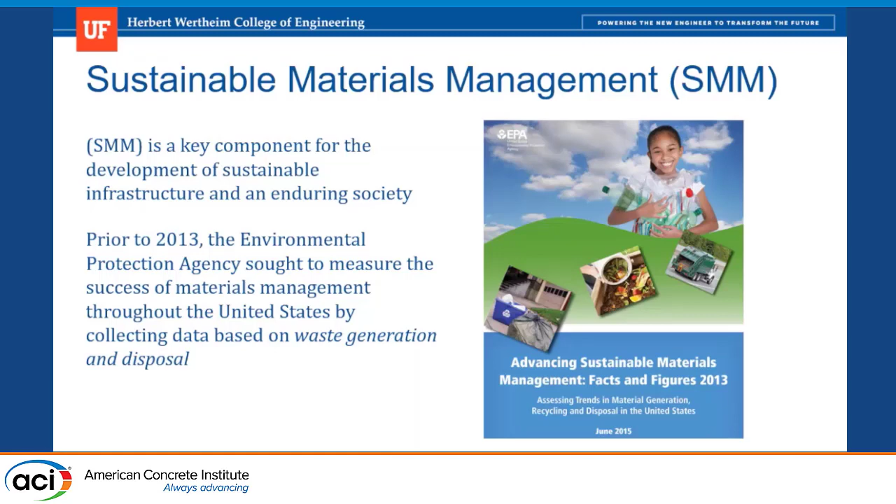This was basically put forward by the EPA about 10 years ago now, where they wanted to see the measurement of success of materials through the US based on waste generation and disposal. So we're talking about waste materials now.

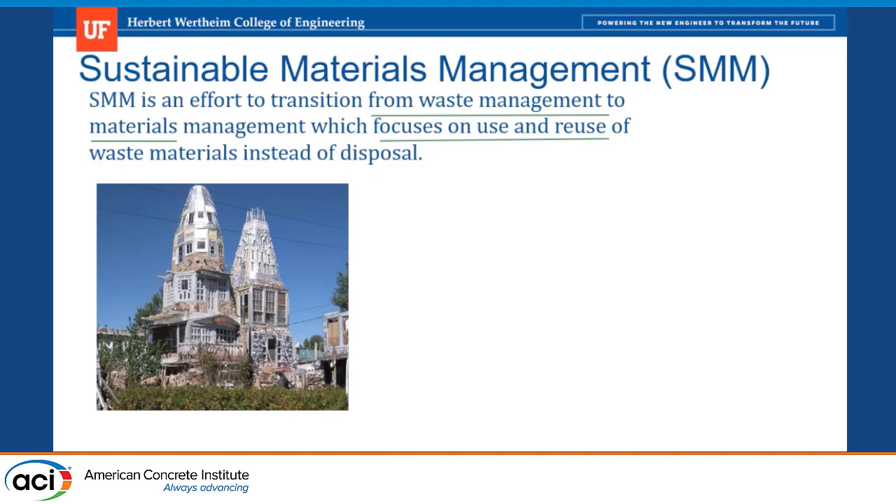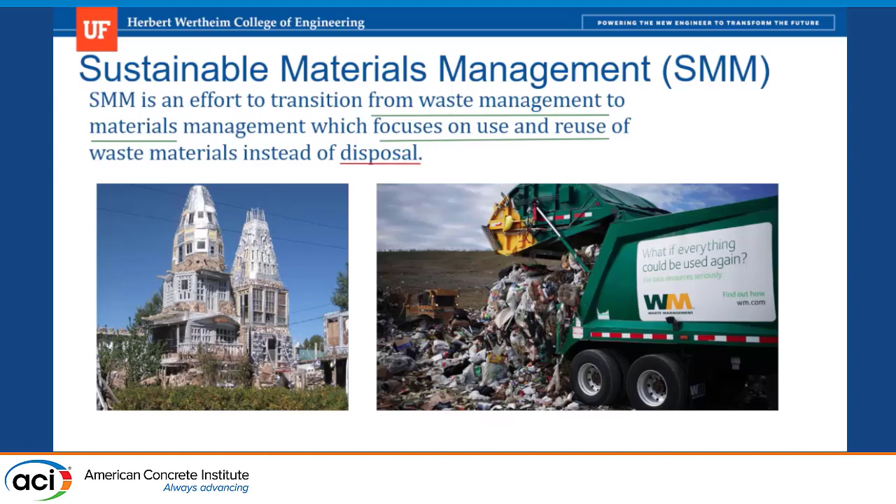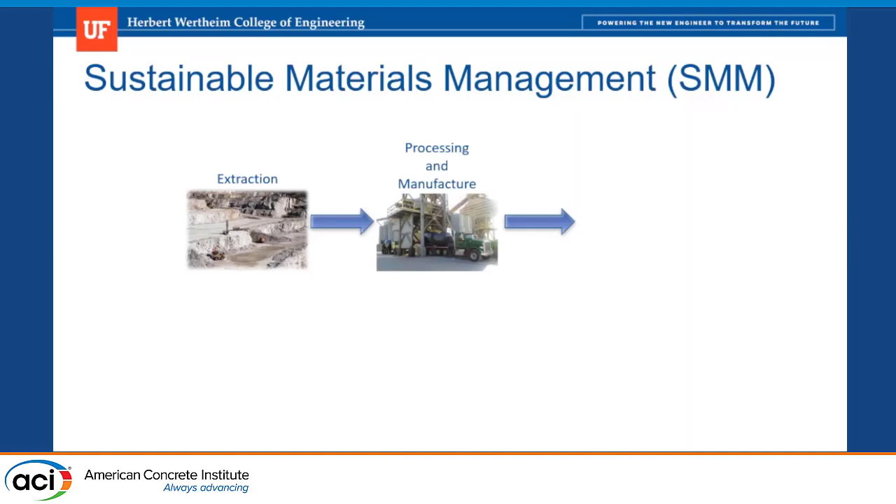When I think of building technologies and some of the themes we have in our class, I get into what do we actually do when we construct something out of concrete. We have an extraction process, we have processing, manufacture, and then we have distribution and use. This is kind of what we do when we build a road, build a building, and so on.

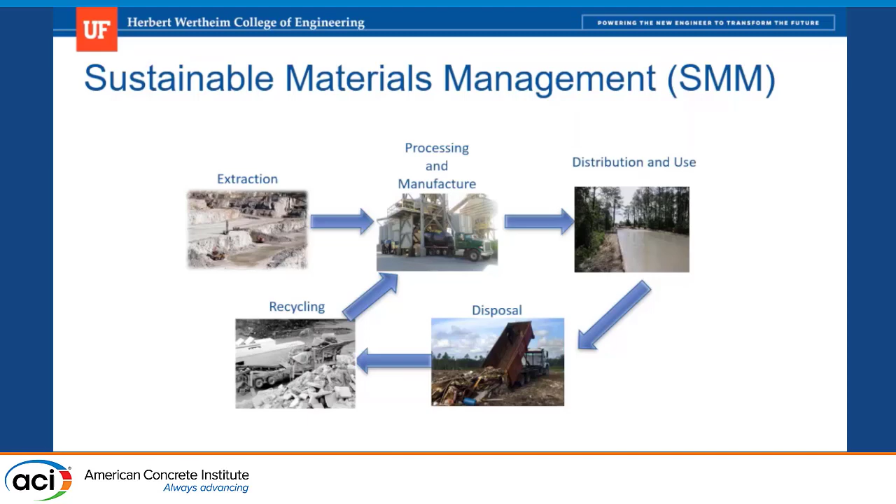As we get into LCA and this cradle to grave initiative, we see that maybe we have some disposal, and if we're lucky, we get a little bit of recycling going on. That's pretty much going from cradle to grave to cradle to cradle, where we have a new cradle, which is our recycled materials. We see two types of processes.

I can give you a whole list of ASTMs and ACI guidance documents that tell me what I must have. If I have aggregate gradation that's a little bit out of place, that material is going to be rejected, even concrete trucks and so on, out of temperature and so on.

But then when I get into recycling, we don't do the same level of, we'll say, scrutiny and control. That's one of the things I think our industry needs to do, the folks that are involved in beneficial reuse have to do. I really want to see how we focus on that moving forward.

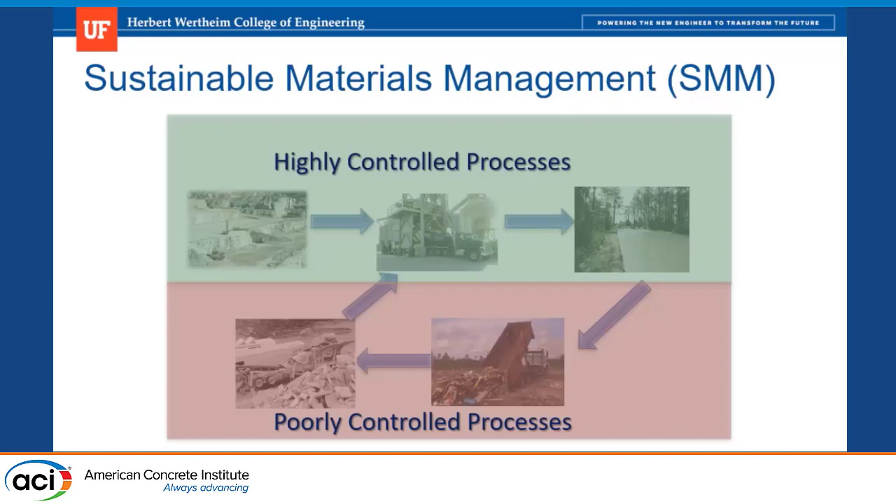So there are a couple aspects to this. When we have a residual, we have our typical ingredients, our cookie from the last lecture, and then we have a manufacturing process and a new product.

One of the things we've been doing, and we actually have a lot of traction on, is using materials as a manufacturing new ingredient like SCM or alternative kiln feed. Right now there are a couple of producers in the state of Florida using waste to energy ash, which I'll define and talk about in a little bit, for kiln feed.

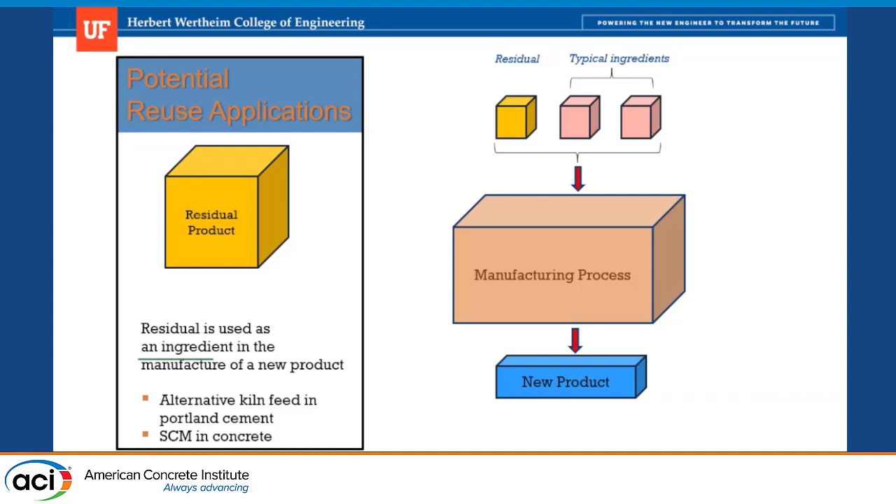So we're taking what would normally be something thrown in the landfill and bringing that out and making Portland cement out of it. That's my cradle to cradle. We're resurrecting materials from the grave and bringing it back into the cradle.

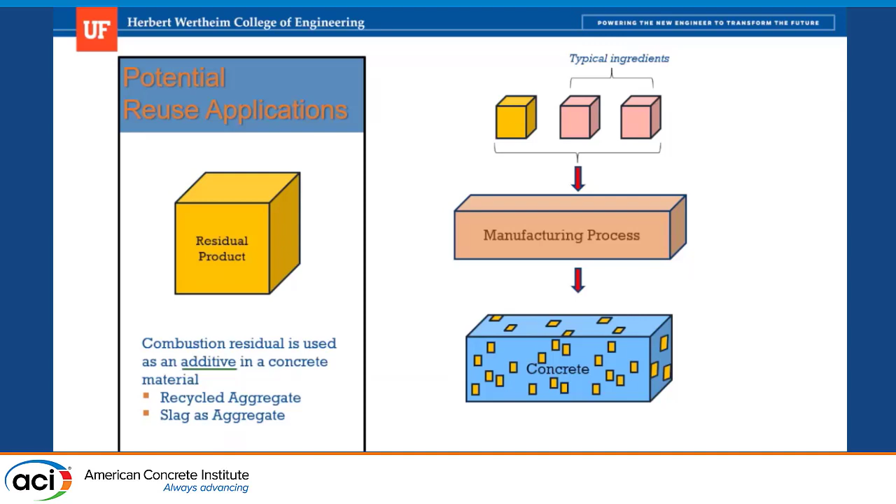The second is if we have something that's maybe more of an additive in a concrete material. So we have typical ingredients, and we're going to go use something, maybe a recycled aggregate, slag, and again, I'm going to talk about one material in particular.

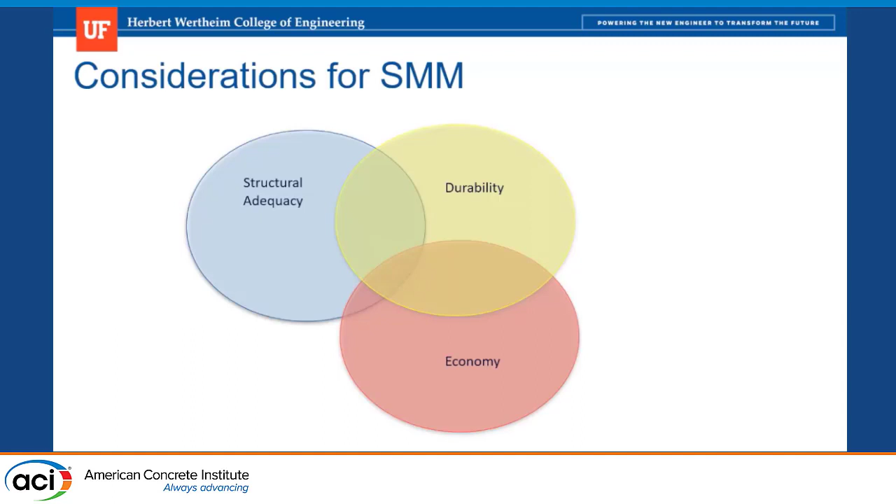When I get into thinking about our considerations for SMM, we have our structural adequacy we have to think about. Durability, obviously, is key. Economy - if we're not going to have economy, no one's going to use it. And then there's an environmental risk.

Matt talked about risk in the last presentation, and environmental risk is a big portion as well. What if this stuff happens to leach a lot of arsenic into the landfill or into the aquifer? Are we going to be able to use that material? Probably no one's going to want to use that. So we really do have to hit the sweet spot with a lot of what we're doing with SMM. And I'm very optimistic that we're able to do that, and doing that.

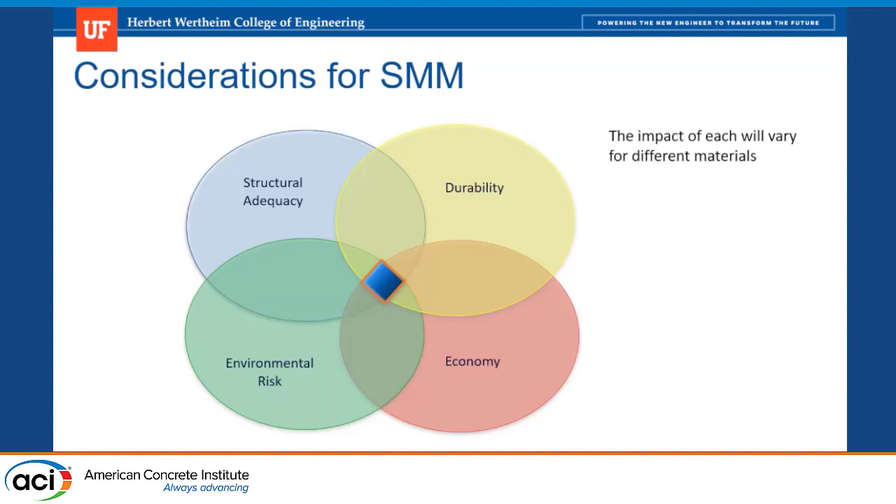And obviously the impact of each of this will vary for different materials. The other thing I want to think about when I think of the Portland cement concrete industry is we have a very long history of SMM. I just don't think we advertise that well. I almost feel like in the last decade or so, a lot of folks have said, well, concrete's bad.

It's a CO2 producing material, and you guys are the devil of all industries creating materials for construction. And my rebuttal to that is, well, we've been using recycled materials for over 100 years now, which is not far off from the patenting of Portland cement itself—50 years later. So I say we are the actual original folks into green concrete.

And obviously we've used fly ash to the point where we're trying to figure out how to mine more of it, and slag obviously—you can know about fly ash shortages and slag shortages in different states. So we've used that to the point of ad nauseum where we can't get any more. And part of that is we've been reducing our mining footprint. We've also been reducing our carbon footprint.

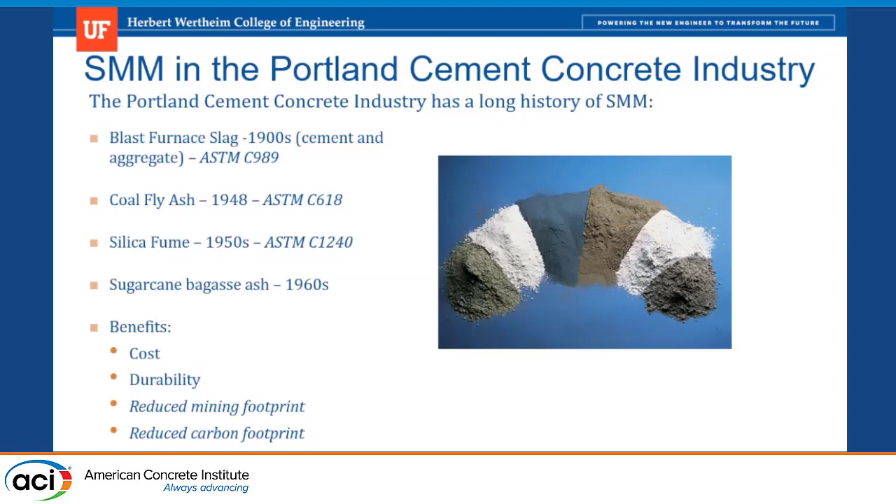And I think this is really the introduction to any sustainable materials management document we put together. One is we're not mining anything when we reuse stuff, and two, we are obviously reducing the carbon footprint. Those are two themes that have to really shine through in our industry.

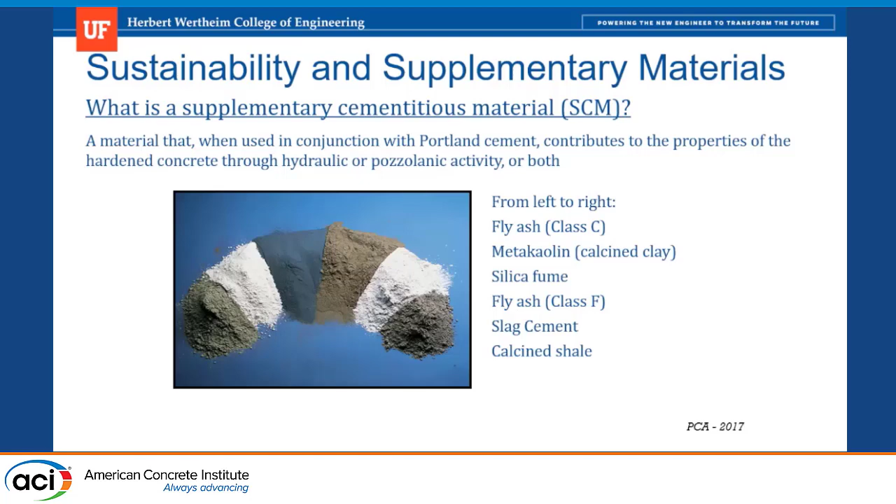Okay, so I talk a lot about in our classes, what about SCMs and what are we doing with those? That can be a couple lectures in either class. But what I want to do now is move on a little bit into more of the environmental aspects.

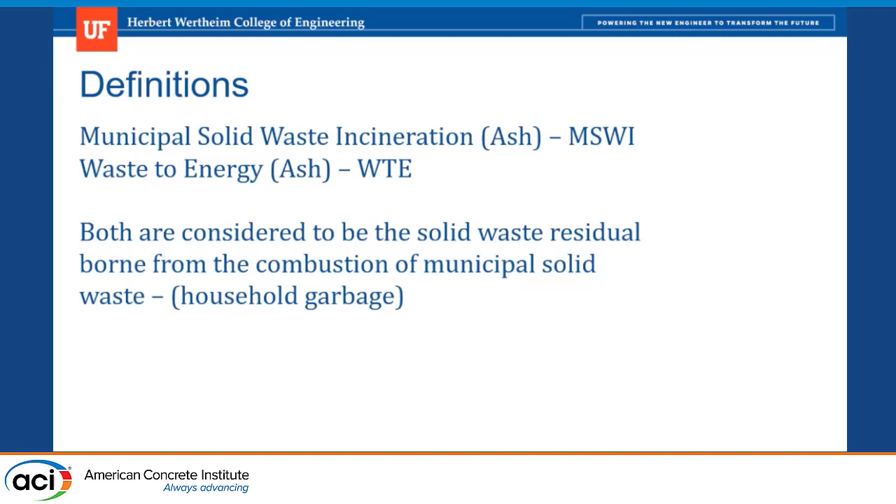So I'm going to talk about MSWI and WTE, and I'll use those interchangeably because we basically do. What those are is basically using solid waste residual, garbage, and then that is burned, and the ash from that is a residual that we can reuse. Obviously, when it's burned, that becomes energy.

In Florida, we have a lot of facilities doing this, and we're not sure if we're going to see a lot more doing it, but we know that these 12 facilities are monofilling a lot of ash each year. And one of my goals—I'll show a picture of the landfill in a little bit.

As we look into sustainability, as we look into beneficial reuse, I'd like to think of landfills as mines. They're industrial mines, they're ugly, they smell bad, but they are mines.

I'll talk about the Pasco County landfill in a little bit, and there's a series of time between the 70s and 90s where they didn't do any metals recovery—not just ferrous metals recovery, any metals recovery. There are some folks that want to mine that landfill. They figure it's about $50 million worth of semi-precious metals, precious metals, and then ferrous, depending upon how that goes, and aluminum.

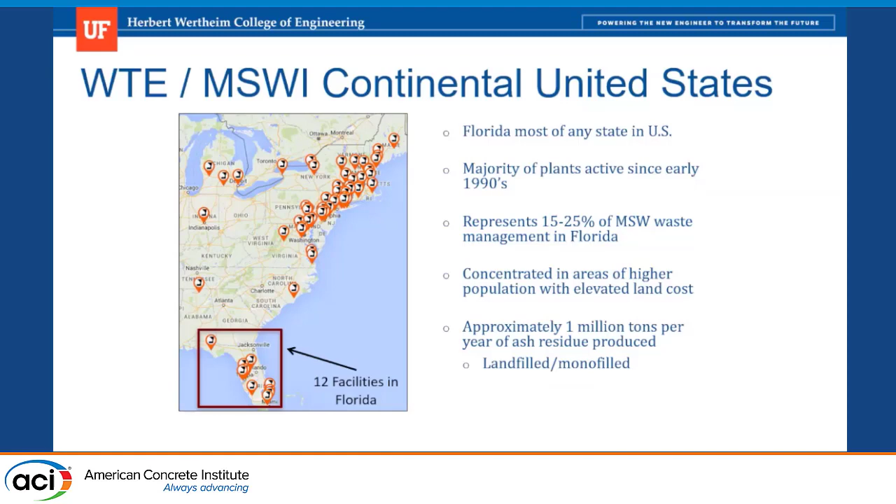So I want people to start getting into that mindset that all of our waste materials are really a potential for a new resource. And so I'm going to spend most of the rest of my lecture talking about this one application we did here in Pasco County, Florida.

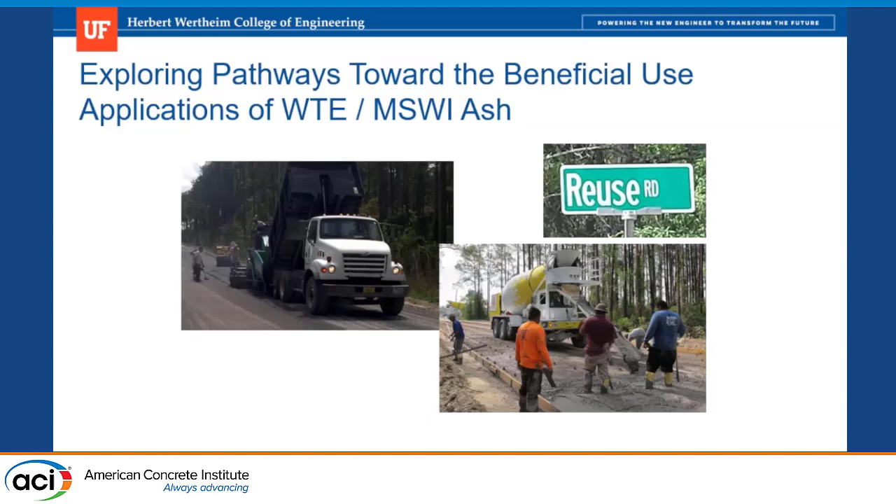Basically, it's a small test roadway that was constructed on the site of a landfill using waste-to-energy ash, and it got a little bit of press—I'm sure you saw the Pasco County Press Reuse Road article. Just kidding. So this is the monofill, and there's a number of these throughout the property owned by Pasco County.

We're basically using fresh waste—anything I've talked about right now is fresh waste. We're getting into mining next. So the idea is, can we mine this stuff? Can we reuse this stuff? And what are the benefits to that?

Well, in Japan, they do a lot of this. They reuse waste-to-energy ash for everything. And so you have a 3-acre site—I don't know the exact volume of it—and that's 100,000 residents over 15 years, and that is their footprint of waste. I'm going to just let that sink in for a second, because this slide, I've stared at this slide.

I actually drew that poor border myself one night while preparing the class slide lecture slides.

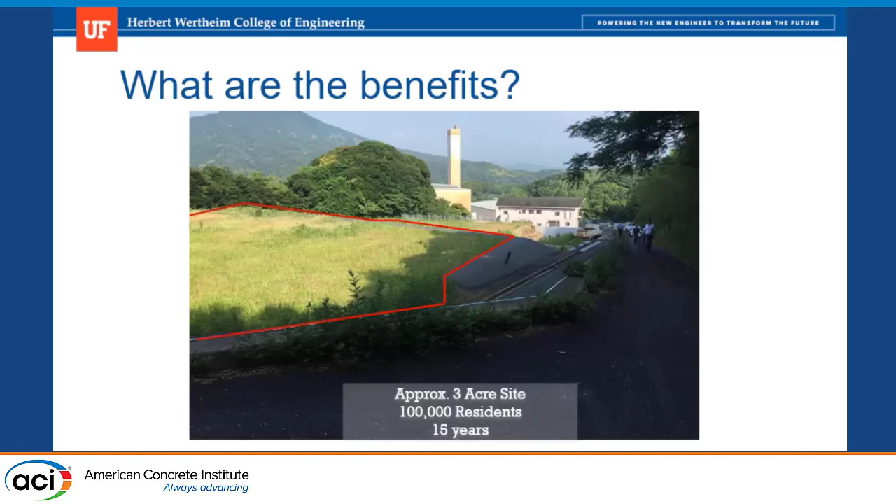But this is impactful, and this is what I think we should be doing in the U.S. The folks in Japan are doing it at a much accelerated pace because they just don't have as much property as we do. We tend to say we've got plenty of property, we'll just throw that stuff away. I really want to get away from that.

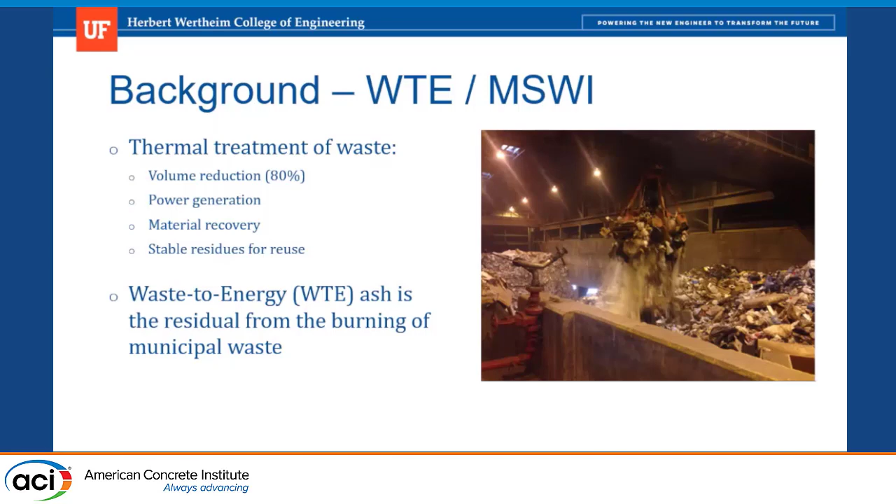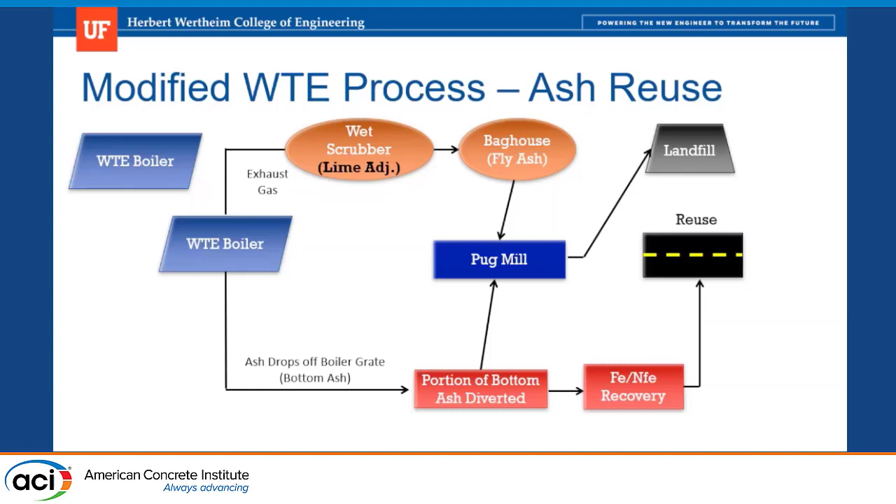So what is municipal solid waste? Basically, all this garbage is put into a big pile, we try to homogenize it, mix it up, and then that stuff gets burned. We have a boiler, and a baghouse that produces fly ash, and then we have bottom ash. The bottom ash and some of the fly ash can potentially be reused, or it goes into the landfill.

What do fly ash and bottom ash look like? Fly ash looks just like fly ash. Now, fly ash is a bit more complicated because it's a hazardous waste when it comes out of the waste-to-energy plant. Bottom ash is about 80% of the residual, and fly ash is about 20%. What most plants do right now is combine them, giving you what's called combined ash.

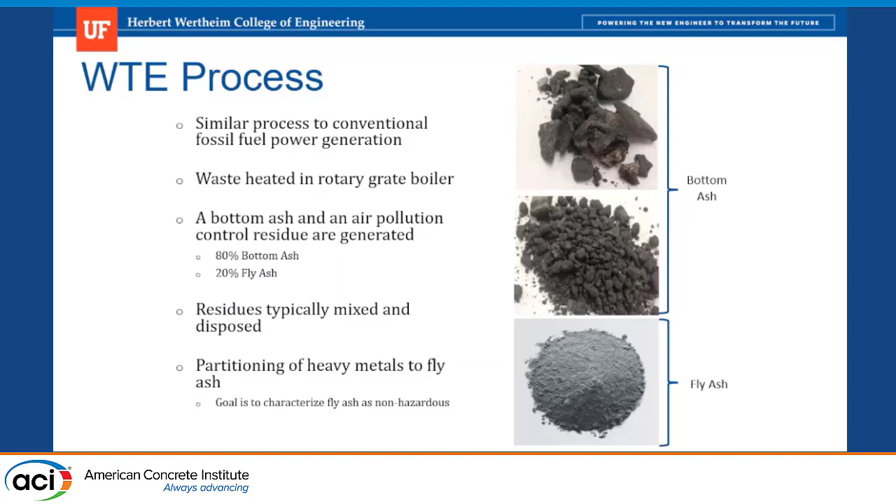The big problem with combined ash is that it doesn't recycle nearly as easily, so we have issues trying to recycle both. But we are using bottom ash for a lot of recycling. One nice thing about Pasco County is they're separating bottom ash from fly ash, so we don't get combined ash.

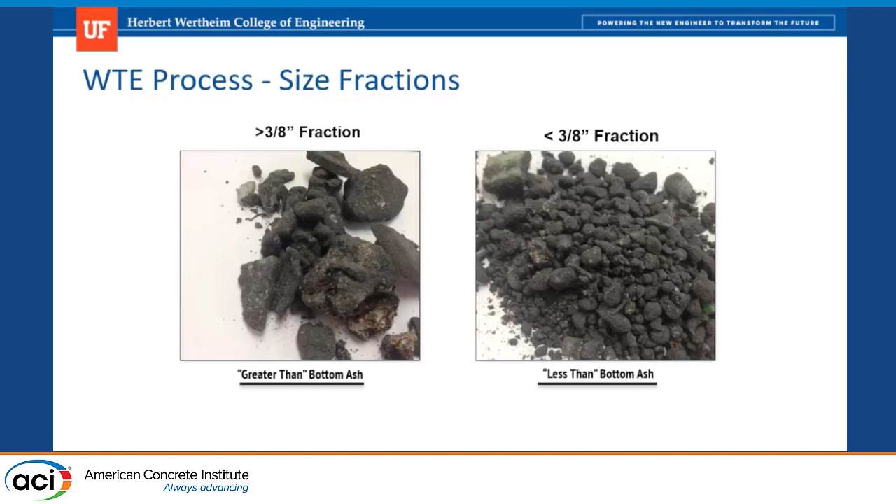From there, we often want to get it into different fractions. Right now, when we look at aggregates, we look at the fraction between 3/4 and 3/8 of an inch. If you look at that material, it really just looks like an ugly, porous, maybe recycled concrete—it looks a lot like concrete. A lot of what's at the bottom of the barrel when you burn waste is concrete materials and slag materials—stuff that doesn't burn very well between 500 and 1,000 degrees C.

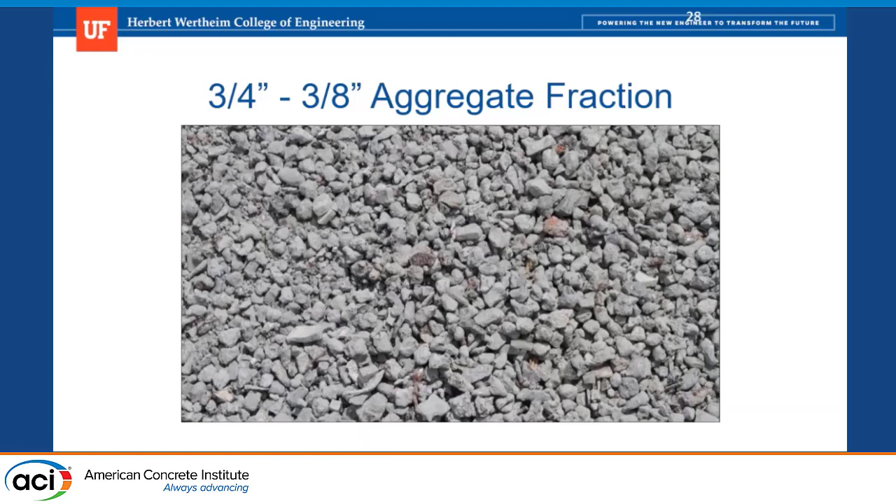There are also magnetic solids in there, and some aluminum. So what does that look like in elemental composition? We've got some aluminum in there, which can be a potential issue, but it can also be compatible if we want to use it as kiln feed.

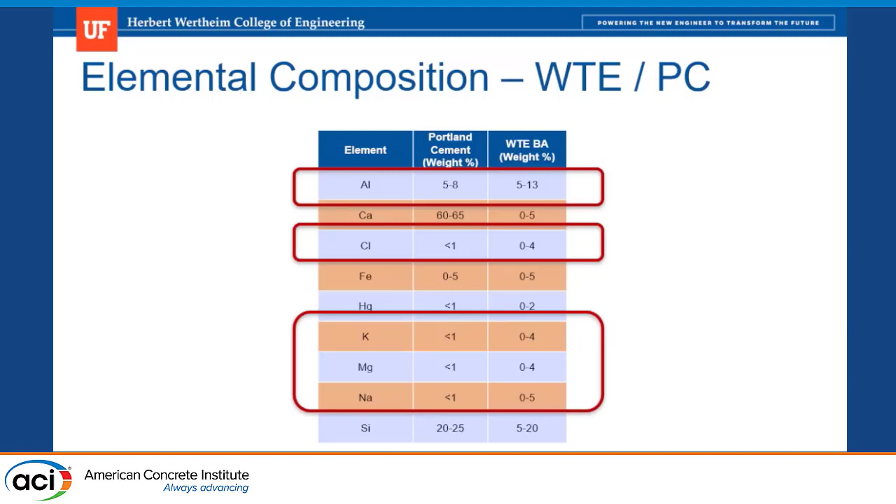Chlorides—everyone wants to know what's going on with chlorides. Is this stuff going to make my rebar corrode? The answer is, if it's not washed, yes it will, as an aggregate. And what's going on with alkalis? Do we have to worry about that too? The answer is we should keep an eye on that as well.

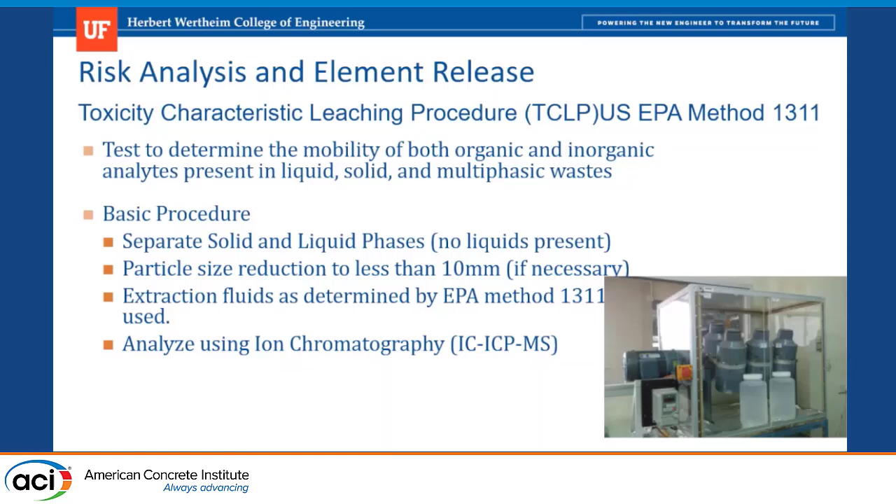When we get into risk, we have the TCLP procedures—this is the environmental engineering aspect of what we're doing. Are these concretes and materials we make with our different waste-to-energy ash going to leach? Are they going to release toxins into the environment? We've done a lot of work with that as well, though I don't have time to summarize it all.

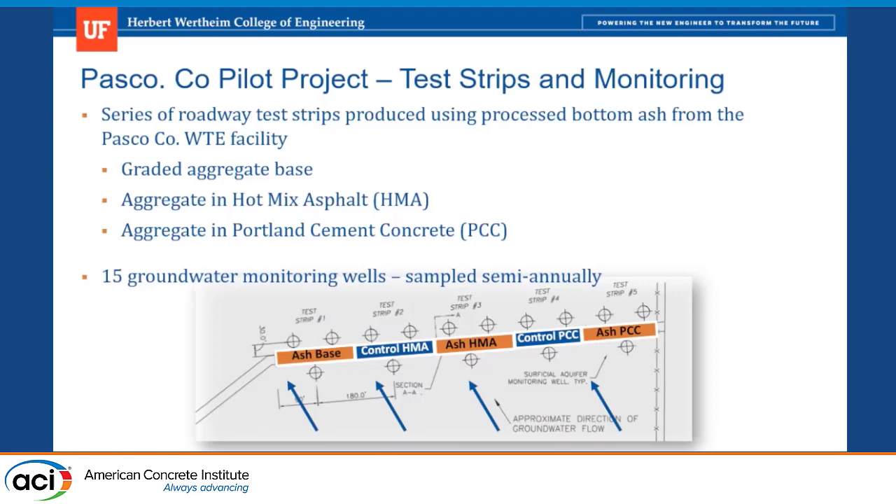I want to talk about one of my favorite projects. We did a number of test strips of roadway, with an ash base, hot mix asphalt, and ash as coarse aggregate in the hot mix asphalt, plus a control concrete and ash as coarse aggregate in Portland cement concrete. We've done groundwater monitoring to see how that's affecting the groundwater, and really, we're not getting anything in there.

So when we think of hot mix asphalt, we all know that. I'm sorry to show the black stuff too, but if we're going to talk about beneficial reuse, I can't limit it only to concrete in our class.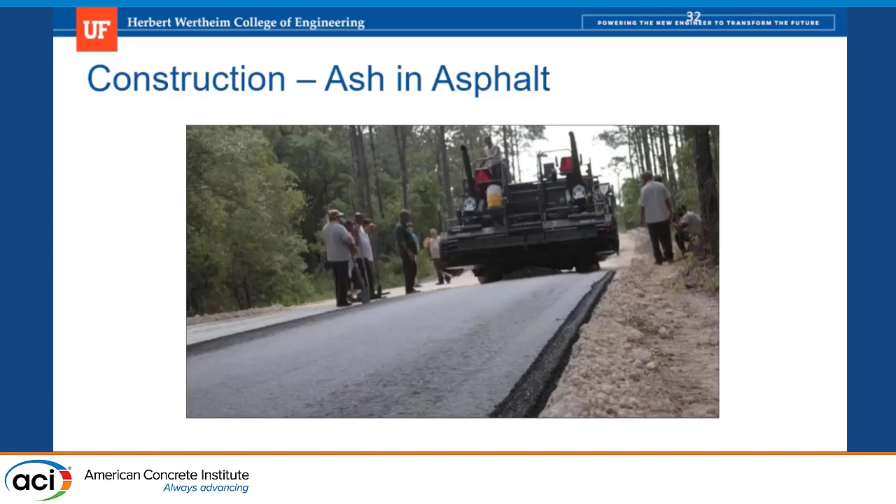I do tell people that the good part about asphalt is it's black, it's sticky, and it smells, and if you want something to last about 10% as long as concrete, you should use it.

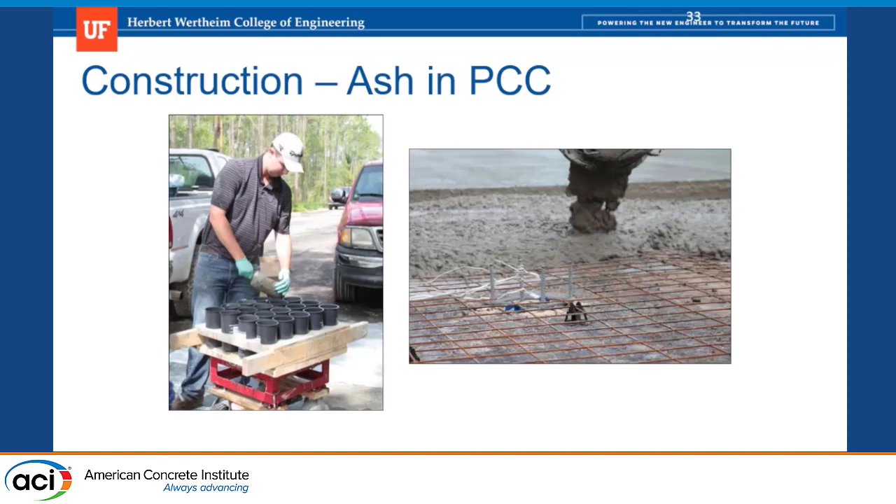When we get into our concrete, this is the road we built there, and we also used ash base, basically taking that ash with the finer fraction as well, not just a coarse fraction, and using that as a road base. What we find out is gradation of the finer material in a base material is important. You can't just go with coarse because it won't give you the same California bearing ratio, but we use lime rock bearing ratio in the state of Florida.

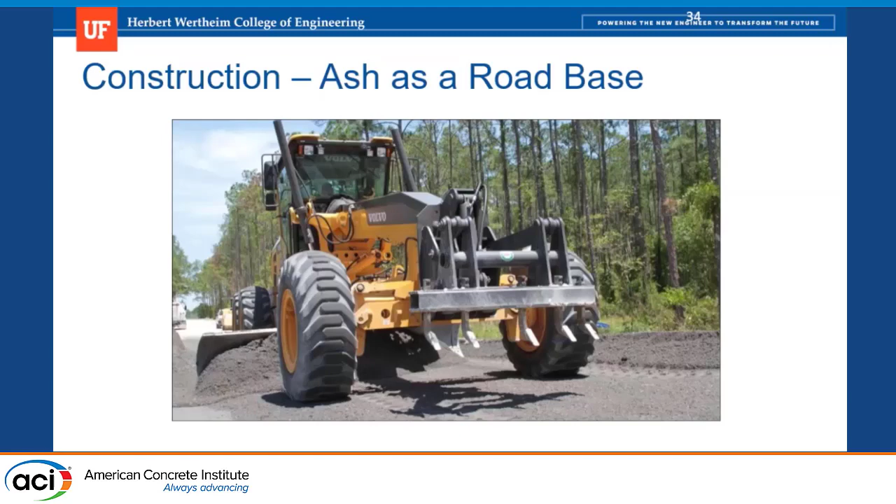So what does that look like? Basically, that's our roadway. The funny part about this roadway is when we built this, we were told, don't worry, Chris, we're never going to run trucks on this thing. You might see 3 cycles of any sort of axles per year. And I was like, fantastic, I could build a road that'll handle that.

And then they decided, oh, there's a project up on I-75 north of us, and we have to truck in all the fill because they need fill to cover up landfills, and we're going to truck that through this road. So it got about 30,000 cycles in the first year. We've done a number of visual inspections of the roadway, and there are no issues.

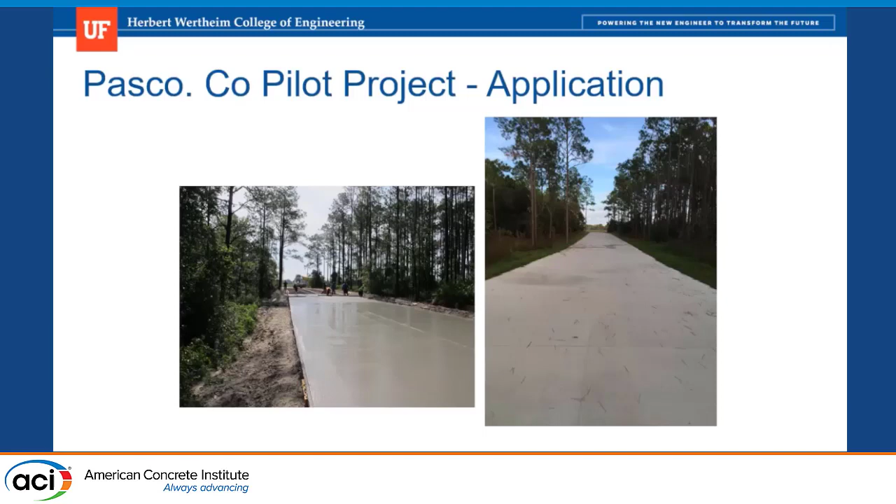Now, getting back to a little of what Matt was saying, and what I want to talk about to wrap up here: LEED and the Green Building Council kind of drive the bus when it comes to us thinking about sustainability, reuse, and so forth. They are the driver, as I said.

One of the things I've been talking about in the sustainability committee, and want to talk a lot about at ACI, is I see a lot of cradle-to-gate definitions. So what is it like when we get this thing here? Doug Hooton was telling a story this morning about a timber building being built in Toronto, 14 stories, because it's supposedly more sustainable than concrete. Meanwhile, they're shipping the lumber from British Columbia.

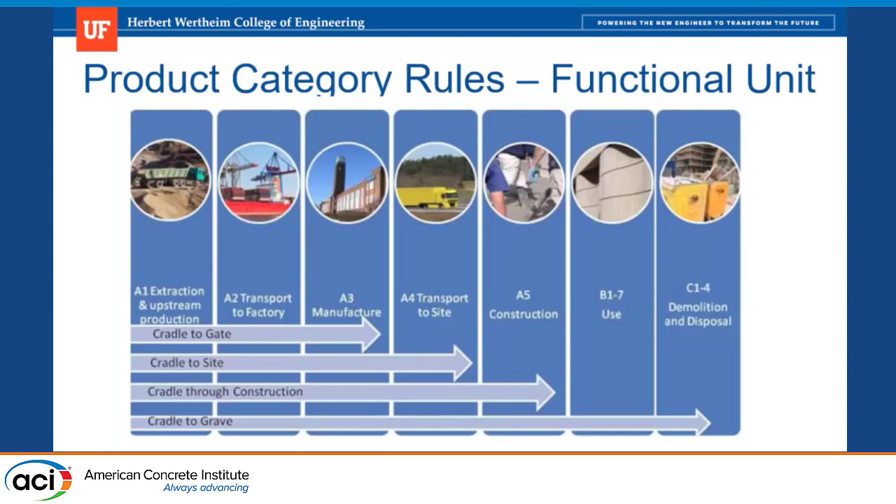So I say we as an industry should focus more on to-site or to-construction, because that's where we make our money. Most ready-mix operations are relatively close to the site, especially when I consider something going from British Columbia to Ontario, and after listening to the folks in the 301 committee argue over how long concrete will last in a truck.

Another aspect of this is when we start thinking of concrete, cement, and so on, it is on the lower portion of the embodied energy scale.

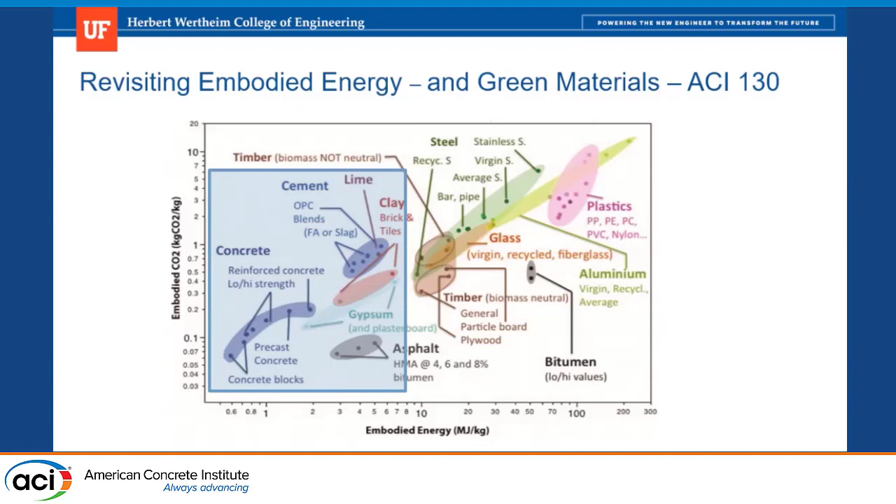Let me just finish up with resilience. Resilience is something we're starting to get a handle on, but we're really silent on as an industry. I think that should change, because we don't really think of resilience and sustainability often together. It took me a while to do it as well.

Then Hurricane Michael came through and basically hit the Gulf coast of Florida, the Panhandle, and a lot of homes were destroyed. The New York Times did a wonderful job saying pouring concrete, even though we placed concrete. They said some other things that were not quite right, but at least they got the general story correct.